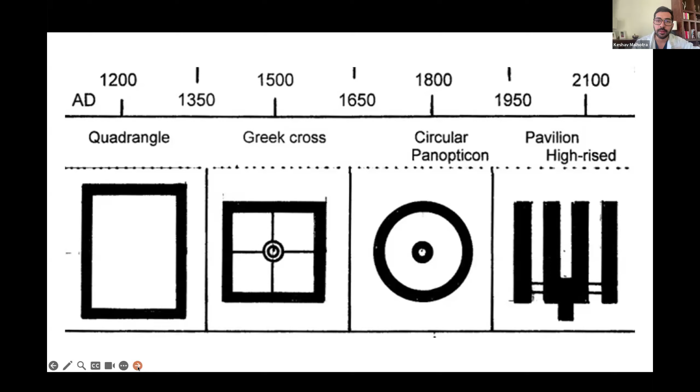This design was not just influenced by how a hospital should look on the exterior, but it also had a certain amount of medical benefits to our patients. Now, these designs, especially the designs that were proposed by Antoine Petit or Florence Nightingale, actually influenced how medical care has evolved, and this tells us the importance of architectural design in our fraternity.

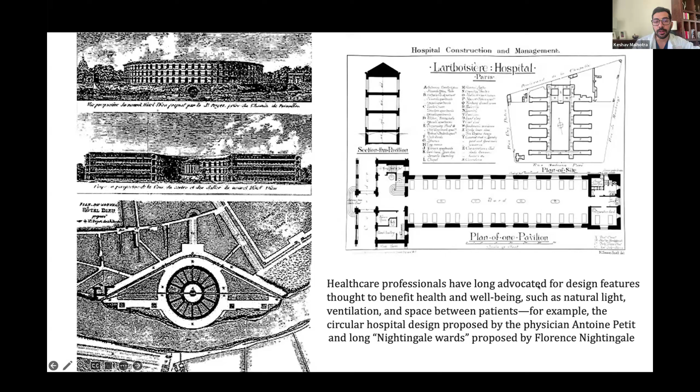These wards that you see right here were actually designed by Florence Nightingale, and what she basically brought to the medical community was the influence of natural light in the hospital ward itself, long spacious corridors with beds on either side so that one could see throughout the ward, and basic concepts which we now really appreciate, which actually came from her: that light can kill bacteria, can help in early recovery of the patient, and can also influence their sleep patterns, can influence how quickly they would enter into a rehabilitatory program, etc. So all of this really teaches us that design does matter in healthcare.

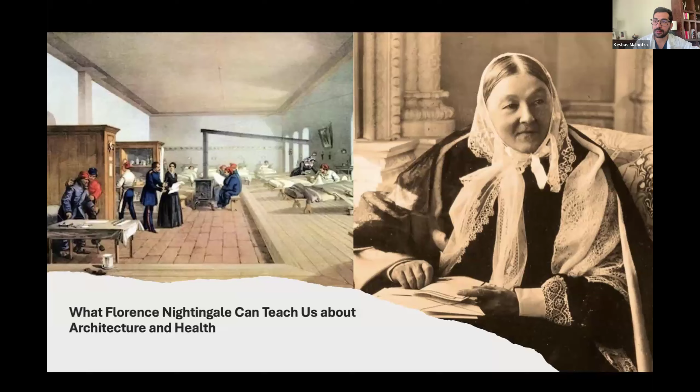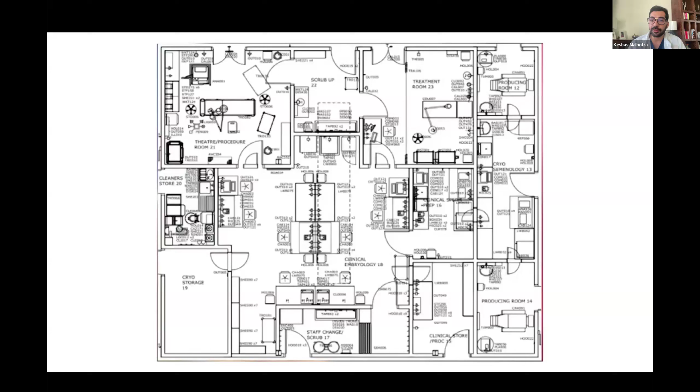There was no sense of VOCs. Nobody really cared much about air quality, particulate matter, flow of the laboratory, ergonomics, all of these things. But now when we look at the last 40 years and how IVF lab design has evolved, we can now see that in these blueprints, there are now segregations for what areas are going to be used by the staff, what areas are going to be used by the patients, what areas have an overlap between these two.

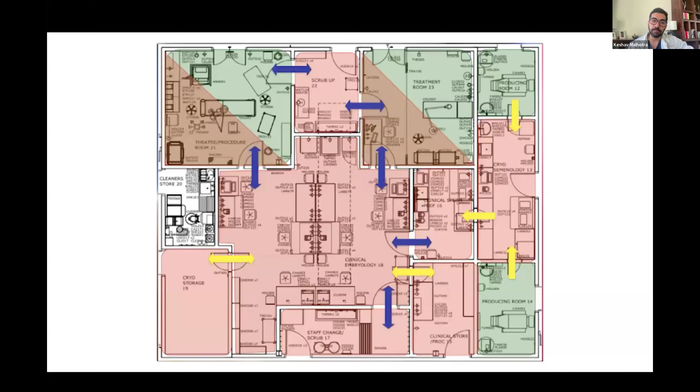We now see entries and exits being planned so that a positive air pressure is maintained between different rooms, especially in the IVF lab complex. We can also see that there might be introduction of certain hatches instead of doors, which allow for minimum access of the area to people. There's less disturbance of people walking in and out of rooms, and this really has changed the way in which we practice IVF, and it has actually helped us to streamline the processes a little bit more.

We know for a certain fact that improper lab conditions will lead to environmental stress. And this environmental stress can be in the form of toxins and pollutants entering into the laboratory, or it could be light source, or it could be mechanical stress, chemical stress, temperature, etc.

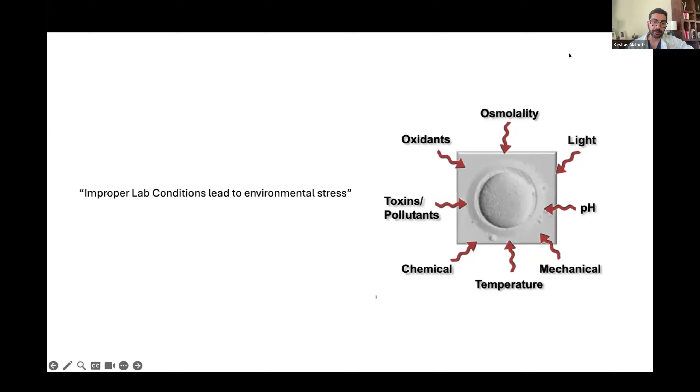A very clear example of this comes from the recent wildfires affecting America. We've noticed that embryos in labs exposed to wildfire smoke had 20% of cycles resulting in no blastocysts forming, compared to just 2% in most other laboratories.

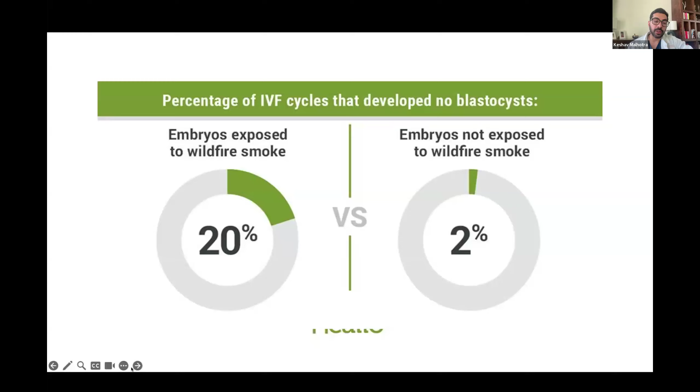This tells us how even our environment and the location of the laboratory and clinic can influence our outcomes. An important design concept to consider is environmental control, which is crucial because embryos are highly sensitive to changes in temperature, humidity, air quality, and light.

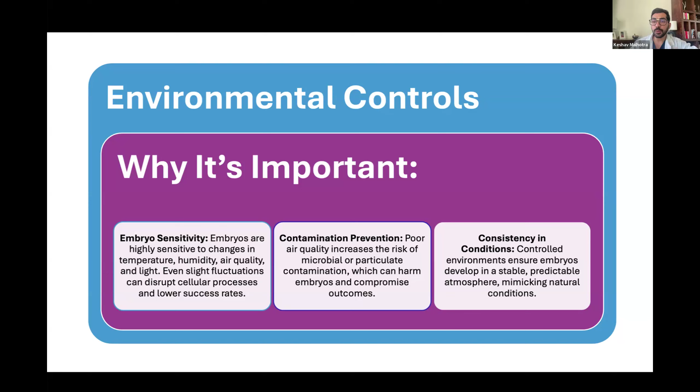We also need to worry about preventing contamination in the laboratory, and I'll show you a couple of instances later where we've seen contamination and the reasons for it. We also want consistency in our results, which can be brought about by introducing certain checks for air quality. I won't talk much about this since our next speaker will cover architectural design in detail, so this is just a brief overview.

We need to think about air quality, which can be achieved through air handling units or HVAC systems in the laboratory. We also need temperature and humidity control, and again an HVAC system really helps with this. Lighting is also something we now need to consider.

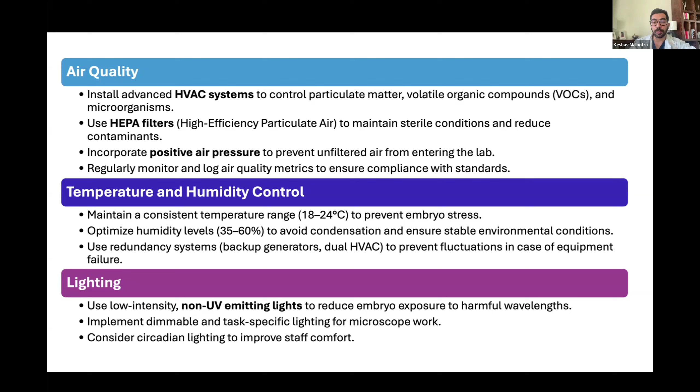There are certain instances where laboratories have huge windows with access to natural light. It's not a bad thing to have those windows, since it impacts the mental health of the embryologist, and they perform better with better visuals in their surroundings. But we need to cover it with a film so the intensity of light entering the laboratory and affecting the embryos can be controlled.

Whenever a lab is designed, you need to look at workflow optimization. This is important because we want to minimize risks. We want to time the procedures and not take too long traveling from one workstation to, let's say, the embryo transfer bed, or from a workstation to the incubator. So we really need to plan accordingly.

We also want to increase the efficiency of the operator, because if the embryologist is just walking from one room to another all day, they're obviously going to get stressed and fatigued, and in the long run this might be one of the causes for burnout.

This can be addressed by ensuring there is lab zoning. We would want to divide the laboratory. Obviously the clinic is divided into clean or sterile zones and non-sterile zones, but even within the laboratory you can have zones dedicated to ovum pickup, to transfer, to ICSI, and sometimes if you have a busy laboratory, a separate zone for pre-implantation genetic testing and embryo biopsy.

The next thing we want to talk about is ergonomics. This is important because we want our staff and embryologists to be productive, and their comfort is of prime importance, because unless you're providing a comfortable work environment that looks after their health and prevents injuries or fatigue, they won't be able to give their 100%. We want to ensure precision in handling, and ultimately reduce burnout.

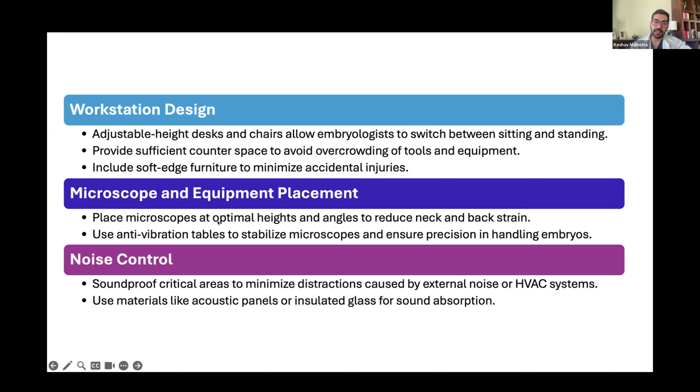How can we ensure this? By designing our workstations properly - having adjustable height desks, chairs, providing sufficient counter space, and soft edge furniture. Most of the time, people in Indian laboratories have stainless steel or aluminum stools, which are not very comfortable for an embryologist sitting for long hours doing ICSIs or cryopreservation. These are small things that really influence the comfort of the embryologist and ultimately their mindset toward that laboratory.

Then we want to think about safety and compliance. Why is this important? Because in scenarios of flooding or fire, we would want a good escape plan for our cryopreserved embryos and stored samples from within the laboratory to outside. If this is not incorporated right from the get-go, it's very difficult to implement later on, and this will influence how you get compliances - especially in the Indian scenario, how you would get NABH compliance for your laboratory if you don't have an exit plan and predetermined exit route.

You also want to think about staff safety. Take the cryo room as an example: it should be ventilated, have an oxygen sensor, and be spacious enough for the embryologist to work properly without damaging the cryo tanks. Certain things, if thought of beforehand, can really help improve our workflow and management within the IVF laboratory.

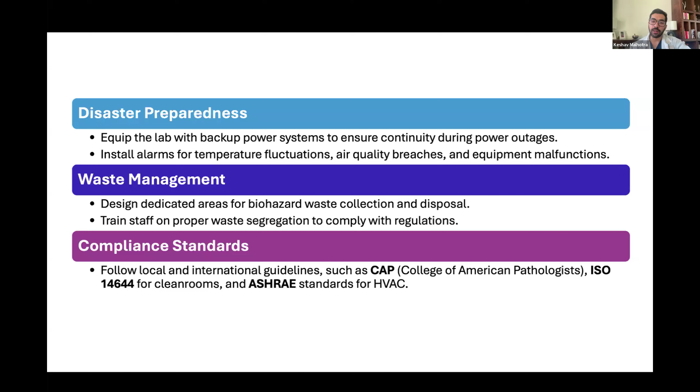Other things to think about are disaster preparation, waste management, and compliance standards specific to your own country.

Then you want to think about scalability and flexibility, and this also has to be incorporated into the lab design right from the get-go. Imagine you've built a laboratory in a 10 by 10 room, and then your center starts doing very well with high numbers, and the lab isn't sufficient. You try to maximize it by stacking incubators and increasing work hours, but ultimately you're not future ready.

If you have a space that's future ready, you can scale operations depending on demand, or incorporate another laboratory. Let's say you started with only an IVF unit, and then scale to an embryo biopsy or PGT-A clinic. All of this, if thought of beforehand, can reduce the downtime associated with refurbishment, reconstruction, or scaling up a laboratory, and ultimately make you more profitable in the future.

This is also where the concept of cost-effective growth comes into picture. This can be done using a modular design, because modular panels can be rearranged or reconfigured as you like. With newer tools available, especially AI-based systems, 3D designs and renders can give you a good enough idea of how to expand in the future.

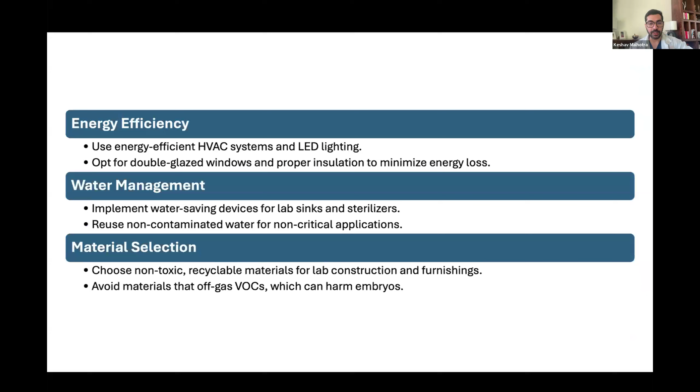These are certain things we would want to basically do for our laboratories.

With this, I'll leave you with four publications. The first one, I'm sure all of you have read, is from ESHRE: the Revised Guidelines for Good Practice in IVF Laboratories, which has a section on IVF lab design.

The second is from ASRM, which again has a section on IVF lab design.

I was part of two more publications: one for the Indian Society of Assisted Reproduction, which talks about safe and ethical practices in IVF clinics, including how to design laboratories and the minimum requirements for IVF clinics and laboratories in India. We did a similar exercise with Aspire, covering lab practices for low and medium resource countries and minimum standards of care for those countries.

All four of these publications can give you a lot of insight into how to design a laboratory for your own country and your own region.

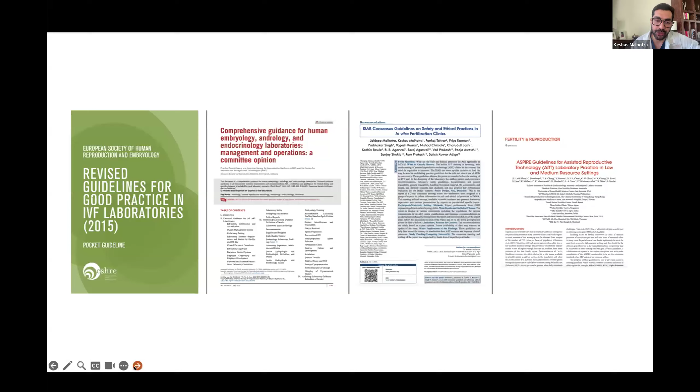Now it's my proud privilege to introduce our key speaker for today's webinar.

We have with us Charmaine Kai. Charmaine is the co-founder and director of 8i Architects, an architectural practice that specializes in designing healthcare, education, government, and high technical projects throughout Australia. She graduated from the University of Queensland with a degree in design studies and architecture, is a registered architect in multiple states throughout Australia, and for more than 20 years has led the design and delivery of IVF clinics and healthcare facilities throughout Australia.

She is a Good Design Australia ambassador for the University of Queensland, has been an interviewer for the Faculty of Medicine, an architectural examiner with the Board of Architects for Queensland, and an expert reference group member for the National Standards of Competency of Architects in Australia. She's passionate about educating clients about holistic design, from inception, planning, construction, and operations to the life cycle of the whole project. She's one of the only architects in Australia who is a member of the Fertility Society of Australia and New Zealand, and also of Aspire, with a special interest in environmentally sustainable design.

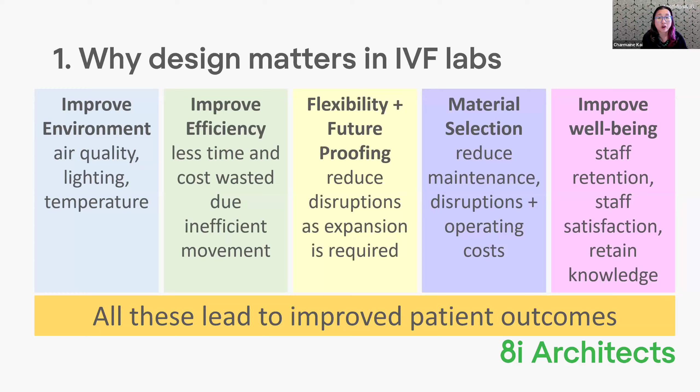So the first thing we're going to talk about is air conditioning. When you are designing a new lab or refurbishing a lab, generally it'll be within an existing building space. If you are lucky enough, you might go into a space that's brand new and purpose built for a lab, but in general, you'll probably go into an existing building.

So what you need to have ideally is a separate HVAC system - heating, ventilation and air conditioning - for the lab. A lot of times labs are co-joined with hospitals. The system for the lab ideally should be completely separate from the hospital system. There are cases where it's unavoidable and you will share a system, but ideally the lab should be in control of their space, particularly given some of the requirements that I'll go through below - it's actually not quite compatible with a hospital space or even a clinic space or an office space. So ideally you keep a completely separate HVAC system.

So one of the things to look out for if you are looking for a new space and thinking of putting an IVF lab in is to have a look at the ceiling height void. The ceiling height void is actually the height between the top of your ceiling to the underside of whatever structure the building is - it might be the roof, it might be the concrete slab of the floor above. That distance - the more space you can get in there, the better for putting in a dedicated air conditioning system for your lab.

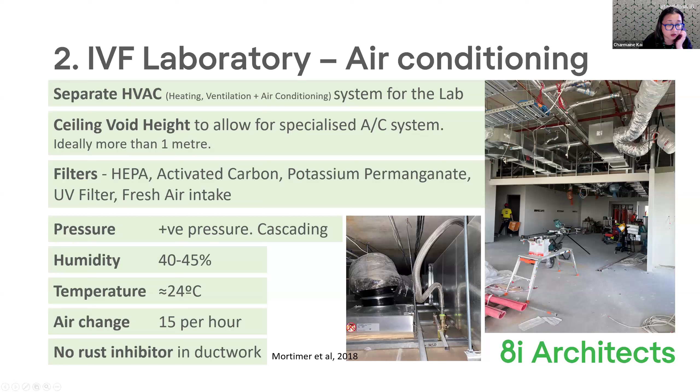The rust inhibitor in ductwork. A lot of prefabricated ductwork comes onto site, these are the steel ducts, the rigid ones, not the flexible ones. A lot of times, particularly in countries with high humidity, like here in Brisbane where we have fairly high humidity, it is generally normal practice for contractors to put rust inhibitors within the ductwork. What you want to stipulate very early on is that they do not put that in, as a lot of times the chemicals in rust inhibitors are actually embryotoxic. And because your air is blowing over the rust inhibitor, you will be pumping those chemicals into your space unknowingly. So something to really think about, particularly for those in countries with high humidity, where it is standard practice to put in rust inhibitors.

So also in terms of air conditioning, that's the more technical side of it. I'm not a mechanical engineer, but over the years of doing this I've learnt all the key elements of things to look out for when designing the lab, so I can actually check and help my client educate the engineers in terms of what we need to do for the air conditioning requirements for the lab, because it is quite specific for an IVF lab.

In Australia, the minimum room height has to be 2.4 metres. Every country will have different types of regulations, so that's the building regulation in Australia. For any space that is occupied it has to be 2.4 metres minimum requirement. There are some exceptions like storage cupboards, but generally any room that has people in it needs to be 2.4 metres. Now in some cases, for a lab, that's all you can get.

So I generally try and design labs that are 2.7 metres high. It's a good ceiling height. You can go higher, but the problem is the higher you go, the more volume of air you need to push within your lab, which ends up increasing costs. It also increases the size of the air conditioning system you need to keep that air circulating. So 2.7 is a good height.

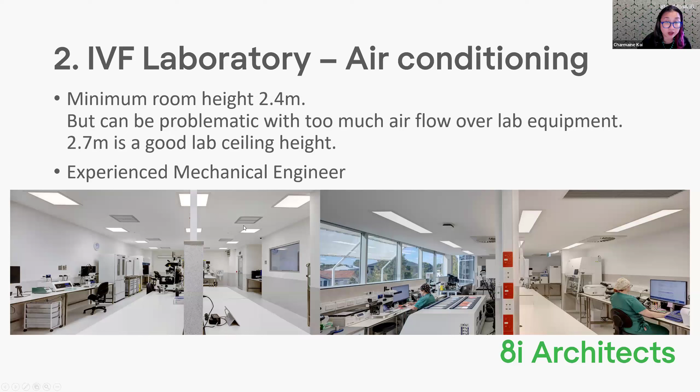So the next one, leading on from air conditioning, is air quality. Keshev's already mentioned the importance of air quality, particularly in a lab.

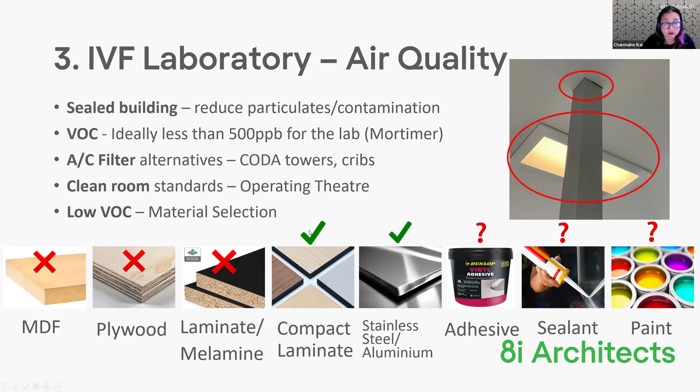Another thing to think about is the building structure and anti-vibration design, particularly given the highly intricate work embryologists do. If you're lucky enough to build a new building rather than move into an existing one, make sure the structure has enough reinforcement in place, particularly if it's a concrete slab in a multi-level building, with enough steel reinforcement to reduce vibration within the slab. Generally you haven't got much control over that, so anti-vibration tables or platforms would be required.

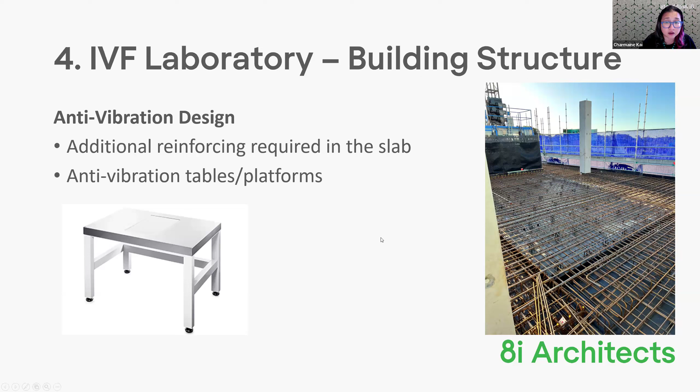This is an image of a building one of my labs went into. Because it was a dedicated hospital and medical centre building, they put a lot of steel in - you can see there's a lot of steel within the concrete slab before they poured it. It gives a lot more rigidity and strength, because we designed this to take LN2 tanks as well, which goes to my next point, about LN2 storage.

Really think about the weight of LN2 storage tanks. As the world moves towards more LN2 storage requirements, particularly now with elective egg freezing becoming more and more popular in Australia, we're storing more materials for longer periods of time. So the requirement for tanks is just going to increase over time, and particularly if your lab grows, the more cycles you do, the more storage you'll need for LN2 tanks - you've got to consider the extra weight of the tanks.

A lot of times you might not have any control about the structure. That's generally the case. If you don't, the rule of thumb is that most of the structure is around the columns within your building. So if you can put your tank room near a column, or very close to one, you'll end up with more strength in those areas, able to take the extra weight of the tanks more so than if you're in the middle of a slab with columns far away. Something to note when putting in a new lab or refurbishing one - where to put your LN2 storage tank room.

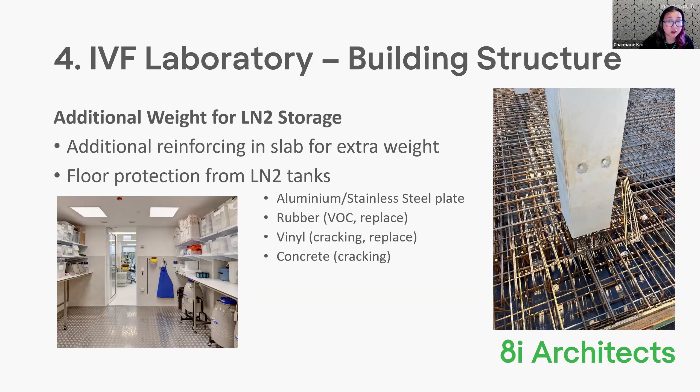Gases - you need gases in your IVF labs. Having a secure store with easy access to a loading bay is important, because you can get really efficient swapping out of your gas bottles, and make sure your gas room allows for growth, so you have enough manifolds or can easily add manifolds.

Generally, most of the bigger lab gas stores are separate from the lab, and I'd encourage that, simply because of deliveries - you don't want delivery people coming into your lab space.

If you're in a multi-story building, you want separate lift access for liquid nitrogen delivery, particularly due to displacement of oxygen if there's a liquid nitrogen spill. So often it's either a dedicated goods lift that only carries goods, or you have a key override, so it goes directly from the basement delivery straight up to the lab space, and no one can enter the actual lift unknowingly.

The use of stainless steel pipework for your gases is what we're trying to aim for. Again, it's something you should let your engineers know, otherwise they'll end up using copper pipes, which isn't as good - we've had some issues with that.

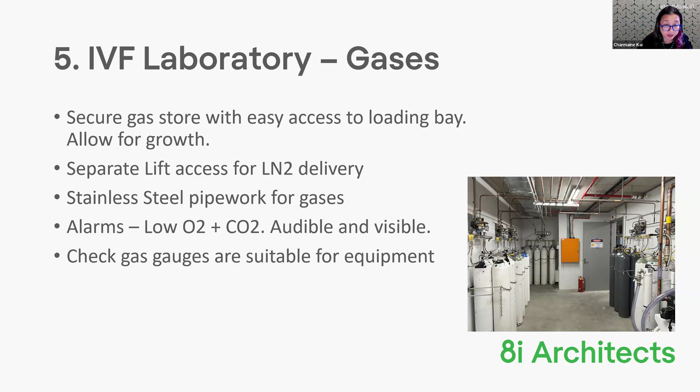The other thing is to check your gas gauges are suitable for the equipment, particularly in the lab. We've had some issues recently where the gas gauges' measurement of gas coming through was a lot higher than what was required for the equipment, meaning you couldn't get a proper gauge of how much gas was going into the equipment. Something to be aware of.

Power is absolutely critical in an IVF lab. UPS and backup power - most equipment requires a UPS simply because it takes out the peaks and dips of power where it's not as reliable, but also for backup, so it's really important.

A lot of times for UPS backup, you need to educate your electrical engineer on the requirement for backup - really the time you need to back up with a UPS is for disaster management. In general, most electrical engineers think of UPSs as connected to computers, so the UPS only lasts a few minutes, maybe 10 to 15 minutes max. That's not the case with IVF labs, because we have to run our incubators 24/7 - they can't stop.

A lot of engineers will try to talk you into reducing the time of the UPS, simply because they'll say the backup generator will kick in. There's been several cases in Australia where the backup generator was the hospital backup generator connected to the lab, and the generator did not work.

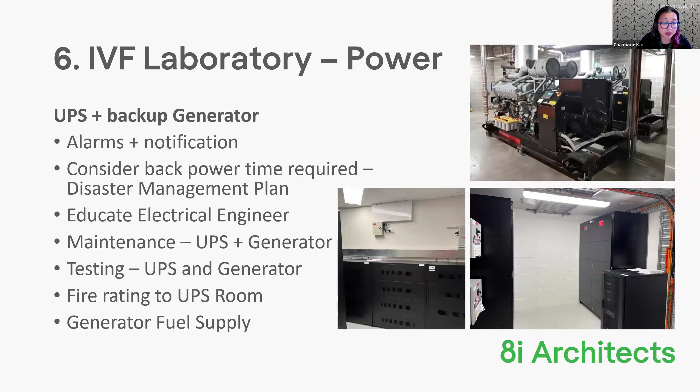I don't need to do anything other than take that plate off, run the wire through, put the new plate on with either power or data points, and then we're off. So if you can have a system that minimizes disruption to the lab, it's ideal.

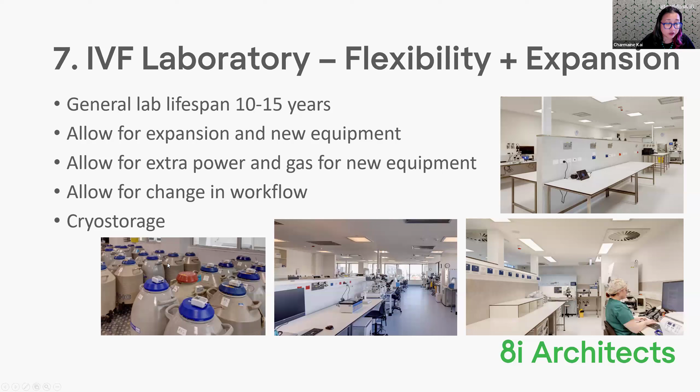But the big one I think coming up that's going to be a proper issue that needs to be looked at collectively is cryo storage. Tanks are growing. A lot of the big facilities I've worked on are adding several new tanks a month. It's something we really need to be thinking about, how to store tanks better and safely, so we don't increase risk to patients in case there's a failure within the tanks.

Staff workflow is really important, so is workflow in the space required, having clear walkways for safety, not only for the staff but also for accident prevention and disaster management. In Australia, we have to have a minimum clear walkway space, no matter the type of facility, at least 1 metre, for fire egress. We cannot have any paths of travel within any facility less than 1 metre in width, so people can exit safely. Building code compliances mean that, depending on the type of building and number of exits, you're not more than 20 or 40 metres away from an exit. So those designated paths are always kept clear, no equipment, no furniture in the way. It's a clear path for safety access, and in a lab that's really important, particularly in disaster management situations where people are moving around quickly.

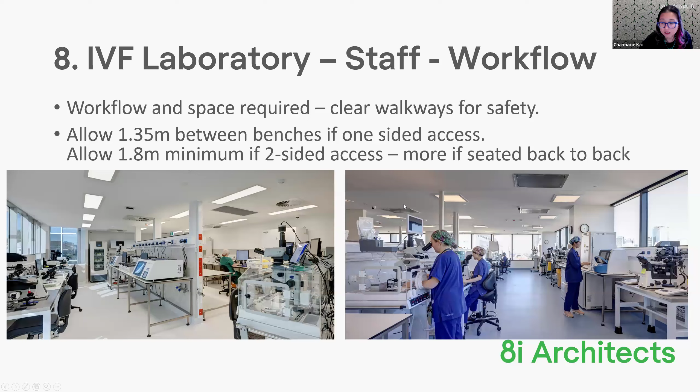It means staff can communicate without compromising air quality, and they can also communicate with each other. It just makes the collegiate atmosphere of the lab a lot more profitable, in terms of people being able to collaborate within the lab. So we generally try to have really good visibility within the lab.

So we use a lot of pass-throughs within the labs, and also maintain pressure within the lab space. And then we'll have a little intercom to talk between the labs, there's a little intercom next to the hatch.

Thank you, that was a fantastic lecture. There's so many things that I myself learned from your lecture, Charmaine. We have a couple of questions, maybe we can answer those before we move on to the next one.

Someone's asking about paneling for partitioning of the IVF laboratory, whether aluminium panels are recommended, and what other options exist. Yes, aluminium panels are absolutely fine. Just make sure your services are pre-cut in and that you allow for expansion, because once you've cut into the aluminium panel for refurbishment work, to patch over it you either have to completely cover it—it's not as simple to fix up if a mistake is made. But yes, aluminium panel is a really good option. It's quite expensive though, so that's the trade-off.

Are there any other options which would be cheaper? Yes, in Australia drywall plasterboard is a really cheap material. It's quick to put up, it's cheap, and generally we'll cover that with wall vinyl just to give it a bit more robustness, because it's actually quite a soft material and equipment moving around will damage it. So we use vinyl—it's quite economical in Australia, and probably in most places. The vinyl protects it, so you won't really have issues with robustness.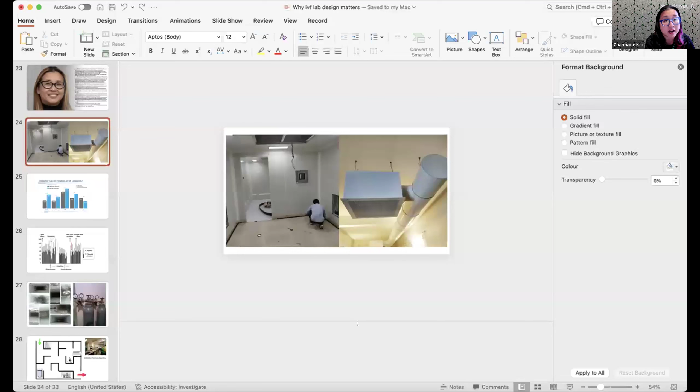In Australia, interestingly enough, there's no strict requirements for an IVF lab facility. So we're using a lot of the research that's come out from either ESHRE or from the alpha scientists as the basis for improving air quality, particularly within the labs and the design of the labs. In Australia, the only real thing we have to comply with is our National Construction Code, which has to do with safety of patients and staff in terms of fire egress. That's probably the essence of what we need to comply with in terms of base building requirements. But otherwise, there actually isn't much - there's an international standard, the International Health Facility Guidelines, which has guidelines about IVF labs as well, but again none of that is really mandatory. A lot of times now, only in the last 12 months, health departments will want to look at the labs to make sure they're up to standard, but they're not really sure what the requirements are either. So it's still a work in progress.

I'll pick your brain now with certain images, Charmaine. I have a comparative image here where on the left side you can see the HVAC is probably going to get installed into the ceiling itself, and on the other side you have this vent that goes through the laboratory and the OT, because this is probably something they did later on. What would your thoughts be? Ideally, I think the one on the left is much better. It's nice and it's going to be a nice sealed space. Once he's finished sealing up all those corners, it's going to be a really nice sealed space where you can control your air pressure and your contaminants.

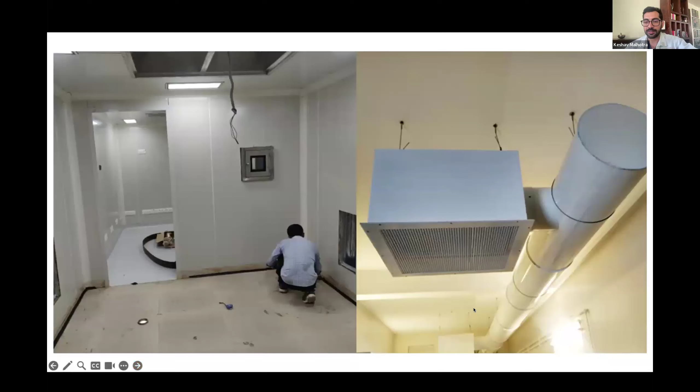That to me is going to look like a really good space. The one on the right will have issues in terms of dust collection - like in all labs, regardless if it's IVF or not, we try to minimize any areas where dust can collect. So even though we've got really good air going through, you will still get dust within an IVF lab. That, to me, like above where the register is - no one's ever going to get up there to clean it, so there'll just be dust all over. Which can end up reducing your fertilization and blastulation rates, and also increasing contamination. It's a source of contamination which we need to avoid.

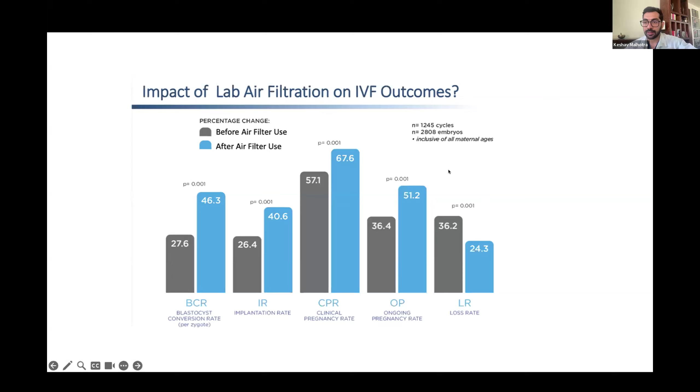This is a nice study I found from Jason Swain, where they compared outcomes before and after air filtration. You can see the nice jump in blastocyst conversion rates, implantation rates, clinical pregnancy rates, ongoing pregnancy rates, and also a reduction in miscarriage rates. This really tells us that filtration and air quality are of utmost importance within the laboratory.

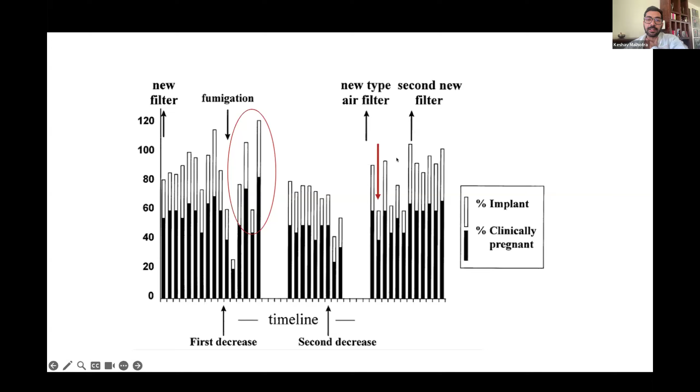This is from Jacques Cohen's group, and it talks about a decrease in clinical pregnancy rates and implantation rates. The first decrease happened during fumigation of the periphery, not the laboratory itself, and it dropped to almost half of what it was originally. The second decrease also happened, and this was probably because the air filters weren't changed. Once the air filter was changed, they got back to their normal standards. These things need to be thought about.

Maintenance is really important for air filters. You can't just leave them in and hope you never need to change them. Location of air filters is really important too - you ideally want to avoid having them within the lab itself, so you don't have service people coming in to change filters within your lab. That's something to think about as well.

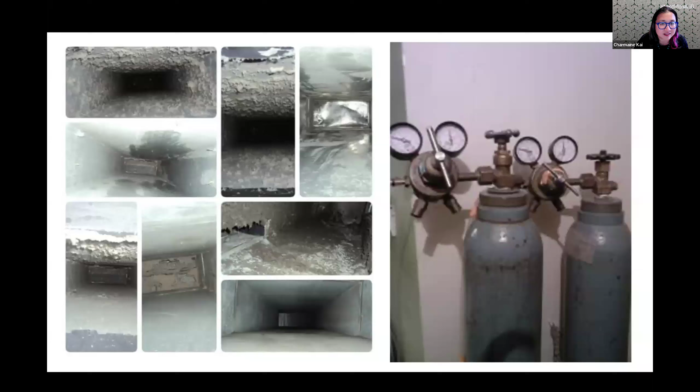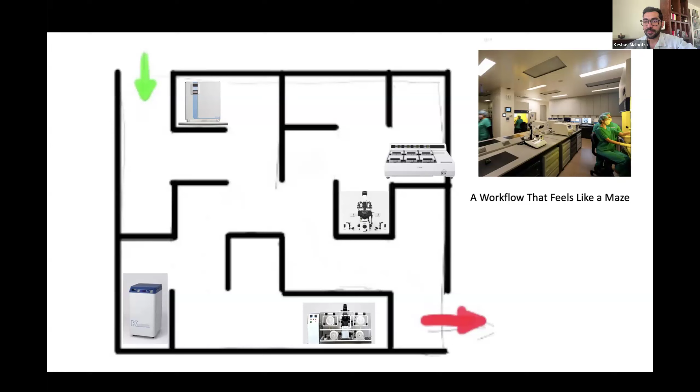I have a couple more images. This talks about workflow - if it feels like a maze, it becomes very difficult for everyone. In a laboratory like this, where there isn't enough space for movement, if someone's working at a workstation or standing at the centrifuge, it really obstructs workflow and frustrates the embryologists who are carrying dishes and trying to reduce exposure. So it's of utmost importance that we plan the laboratory well.

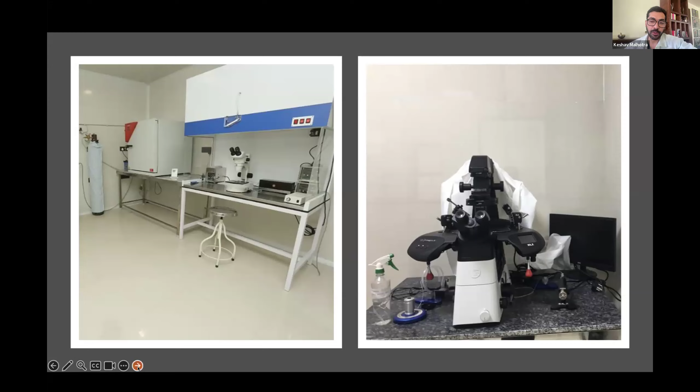Things like a cylinder within the laboratory are something we'd want to avoid for ergonomic purposes, along with having better stools. Countertops are also important, especially if there's high vibration within the building - you'd want to invest in something better, particularly for ICSI workstations. This is my laboratory - I still need to work on my floor, but this is where I've been working for the last 14 years.

What we've incorporated now is an alarm system for the laboratory that monitors the environment. It's an Indian-made system called Lab Health, and it's something you can think about if interested. It gives me a good overview of how the environment for my lab is doing, and a lot of peace of mind.

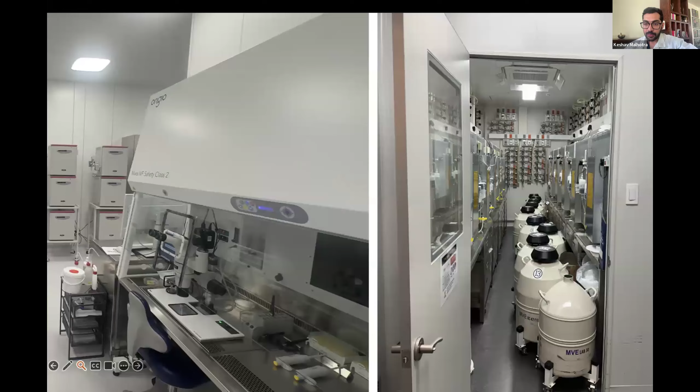What I really liked is that all the backs of the incubators, the gas supply regulators, and everything else are within one room - so you just need to enter that room to change filters or do whatever maintenance is needed. All the service and maintenance happens there, and it's connected to two different laboratories within the same unit. That's really good because it means people servicing it don't need to enter the lab at all. It was a fantastic experience visiting this, Cha Hospital in Korea.

With this, Charmaine, I believe you have another presentation on modern emerging trends in architecture. After that, we can keep it as a short, brief presentation since we've already run a lot of time, and then we can have some more questions and end the session.

So, modernizing sort of emerging trends in IVF labs. Probably one of the biggest emerging trends at the moment is patient experience. People are expecting IVF to be more like a status symbol rather than a necessity, so it's moving towards having more patient-centered design. We need to really think about that. A few emerging trends: patient-centered design, which has been around for a while but is really ramping up at the moment, a visible process for patients, equipment, AI, sustainability, and costs.

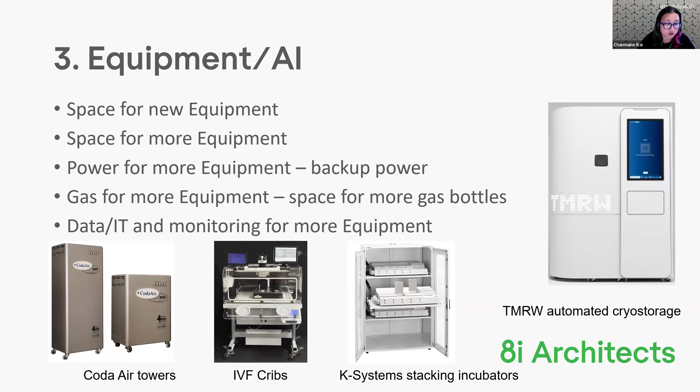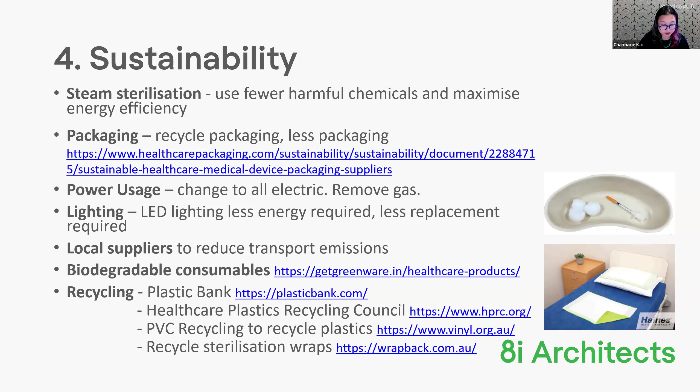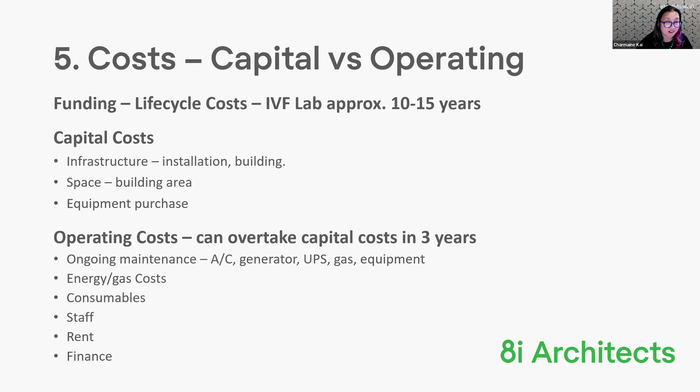That's really quite a quick look at things that are coming up.

I really like the way that the embryo transfer rooms were actually being planned, because that's one place where you would want the patient to be as relaxed as possible, since it's the culmination of an IVF cycle. If the patient's not comfortable, if they're too tight with their bodies, it gets difficult for the consultant to really ensure a smooth transfer. And I absolutely love how the transfer room is planned, overlooking the nice, beautiful park down below.

Honestly, it would be a very nice place to work at, and I'm sure the patients would also enjoy such kind of comforts.